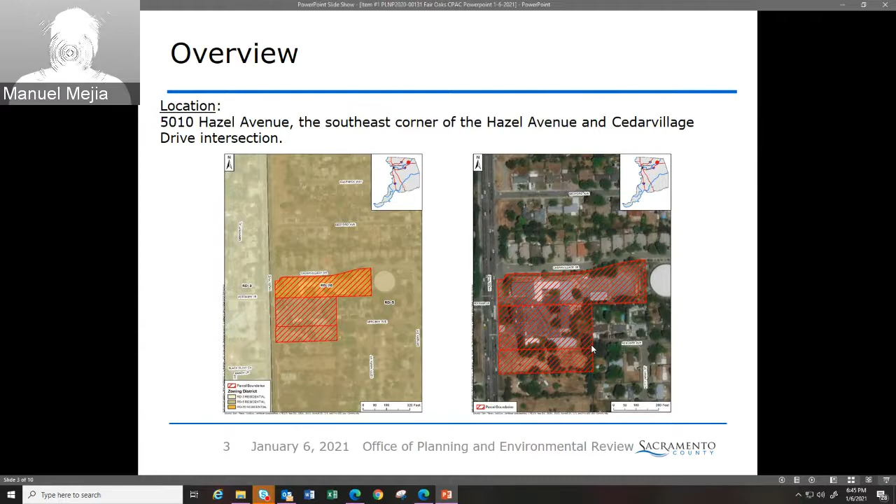This request is for a use permit amendment to allow expansion of an existing church by increasing the assembly use to 800 persons, the expansion of the private K-12 school to allow up to 300 students, and the future construction of a 25,000 square foot new building and additions to replace existing modular buildings, and construction of new parking. This also includes a design review to comply with the countywide design guidelines. There is an existing use permit granted in 1984, which was approved to legalize an existing church with school and allow a mobile home to be placed on the property as a residence. Next slide.

Additional information: the project is separated into two phases. Phase one, which is what they're doing now, is a near-term plan to add 24 new parking spaces, new landscaping, and new driveways on the western portion of the property. Phase two, which can happen at any time in the future, is the master plan for an expansion involving construction of a 25,000 square foot new building, addition replacing the existing modular buildings, and construction of new parking. No set timeline for the future development has been set by the church; however, phase one development is targeted for 2022 to 2023.

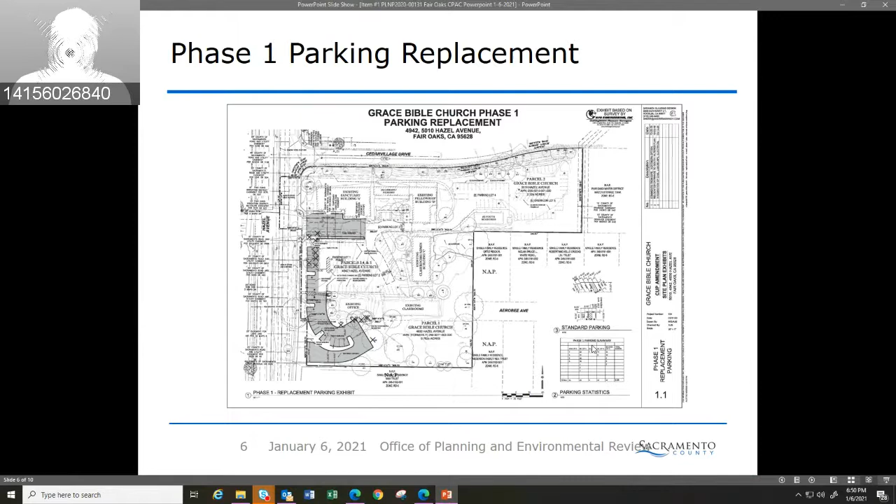As a result, the north and south driveways of the campus are being redesigned as part of the county project, requiring 21 existing parking spaces to be replaced with the 24 proposed under the phase one parking lot. There's a slight correction from the previous slide: the northern driveway is not currently an entrance to the campus, but exit only. That new driveway will become a signalized part of the intersection with both entrance and exit access for the campus. We can skip to the next two slides.

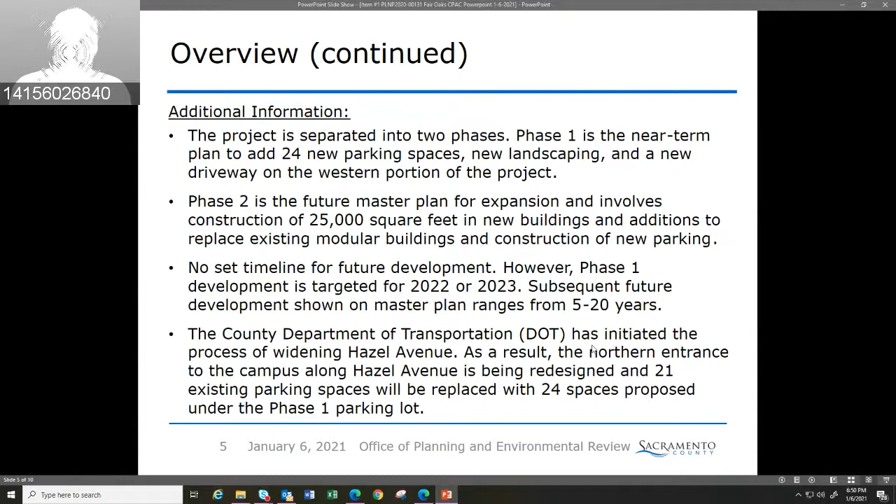Here we have the landscaping that's associated with the phase one development. Next slide, please.

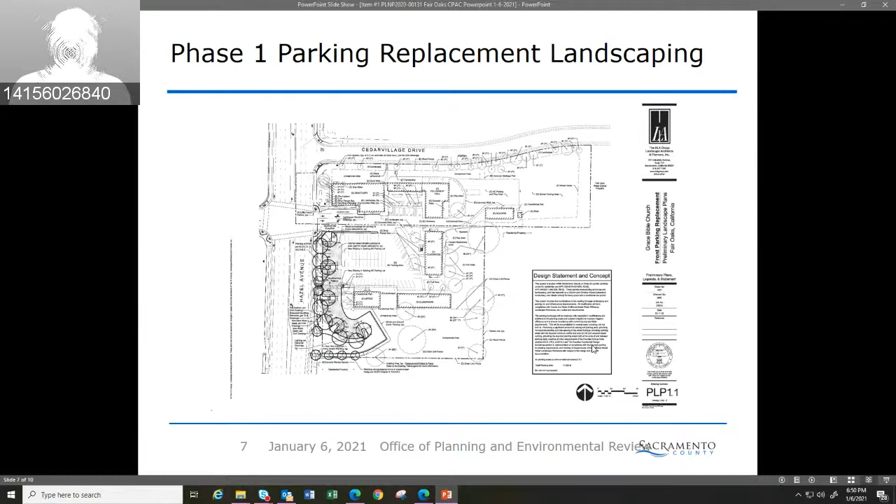Here we have a master site plan where there is 25,000 square feet being proposed in both new buildings and building additions. Those additions are proposed as a way to replace existing modular buildings, as well as new parking being proposed as part of this master future site development. So 20,000 square feet of this is being proposed under the new building that you can see at the center of this site plan, and an additional 5,000 square feet will be in addition to the sanctuary building as well as the nursery.

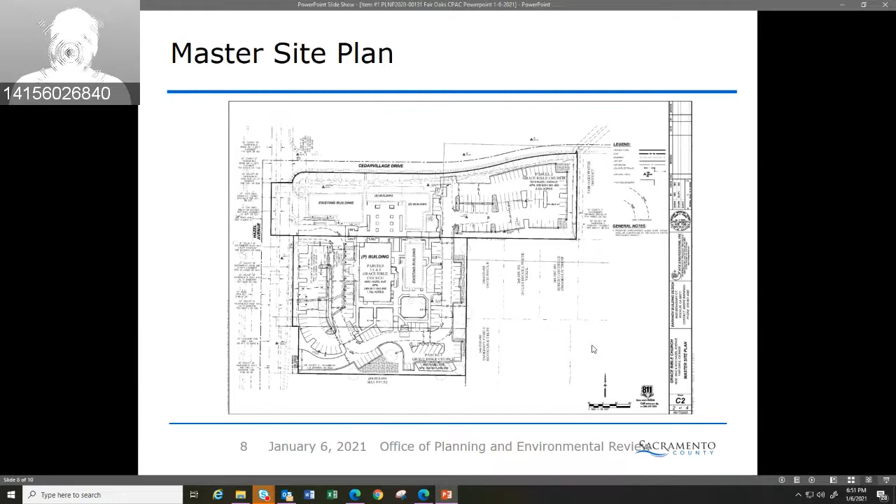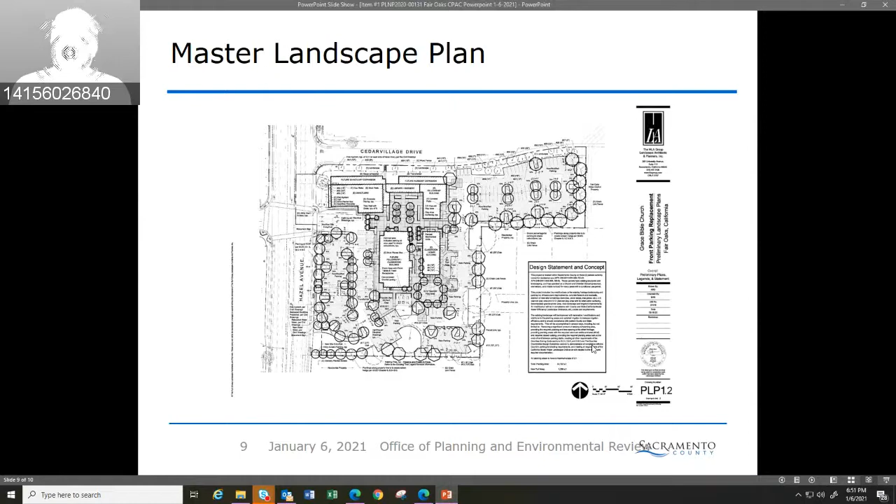Next slide, please. Here we have a view of the landscaping associated with that master plan as well. I think that concludes the presentation. Again, I am very sorry for the audio issues earlier, but I appreciate Manuel stepping in and covering it very well. Thank you very much.

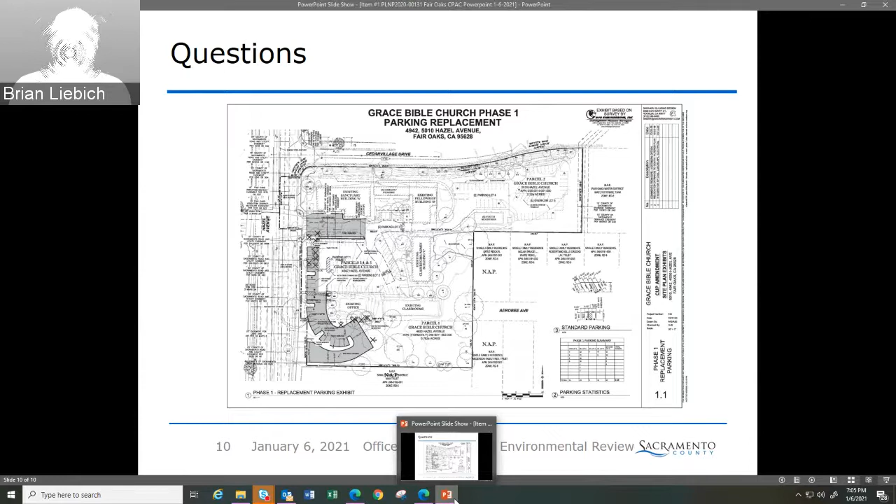Yes, so I can provide my contact information if you'd like to speak with me, or the church office is available Tuesday through Friday during normal hours. Walk right on in and talk with somebody there. We're happy to engage with anyone who wants to talk.

Yeah, this is Andre Baranov again. We did a couple of neighborhood meetings, but COVID certainly was just beginning when we did those, and we did one on Zoom. So we've been reaching out, but both of those were no-shows, which, you know, it's understandable given the complexity and the newness of everything that was going on.

At this point, we will go to general comment and discussion from CPAC members. We can open it up generally to discussion, but I'll go through if there are any comments. I'll start this time with Member Bowman.

No comments. I truly appreciate the thoroughness on taking everything into consideration, including the underground drainage and sound wall, and the entire presentation in full. So thank you.

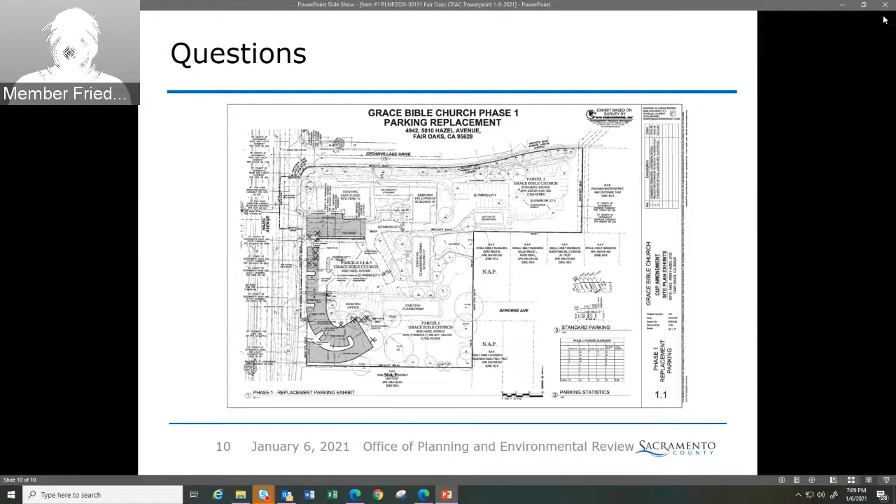Member Bowman makes a recommendation to approve as proposed. A motion to recommend as proposed. Do I hear a second? Member Wood, I second. Okay, and then we will do a roll call vote.

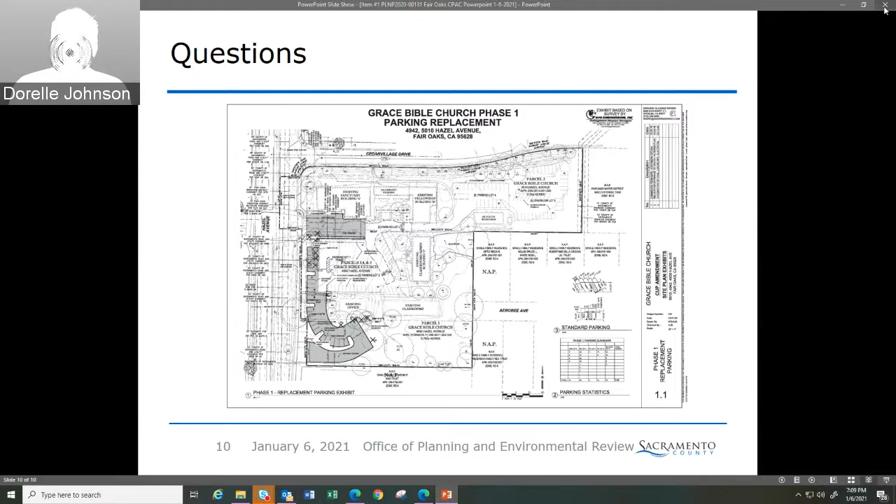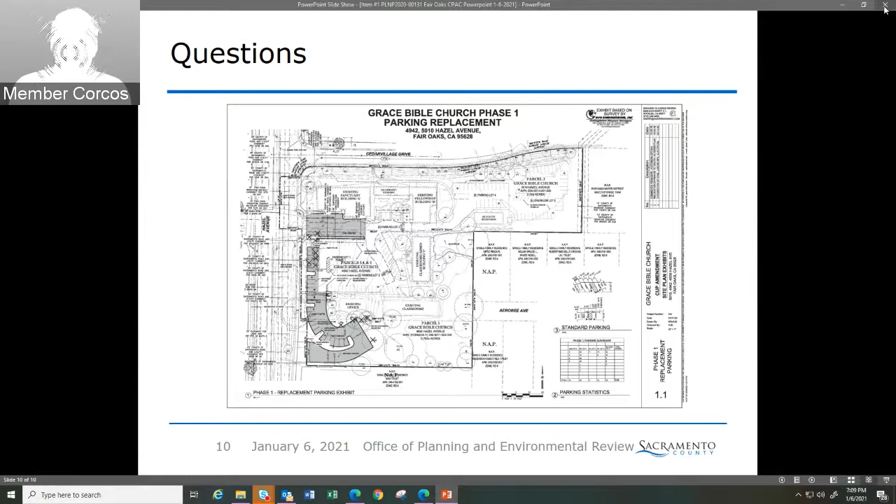This is Dorelle with the clerk of the board. Member Bowman? Yes. Member Corcos? Approve. Member Lees? Approve. Member Starkovich? Approve. Member Walter? Member Wood? Approve. And Member Friedman? Approve. Your motion carries with Member Walter being absent.

Thank you. Thank you all. Thank you. Thank you. No, nice little sound effect at the end. Perfect. Thank you very much for your time. Good luck with your project. Thank you. Yeah, thank you, Belites. Okay.

And we'll move on to item number 2 on the agenda, PLNP 2020-00291, and that's 8572 Sunset Avenue, and this is an early CPAC workshop.

I know we have a number of comments that came in, and I believe we have some comments that will be dialed in as well for this item. I just want to state that on workshop items, this is something we encourage for any item, because this gives an opportunity for the county as well as the applicant to present in front of the CPAC and get feedback. All feedback is welcome. We encourage feedback to be as constructive as possible and to offer suggestions where improvements can be made and how we can encourage the best use of our community. So this is something we always encourage applicants. It's nice to see workshops come before us.

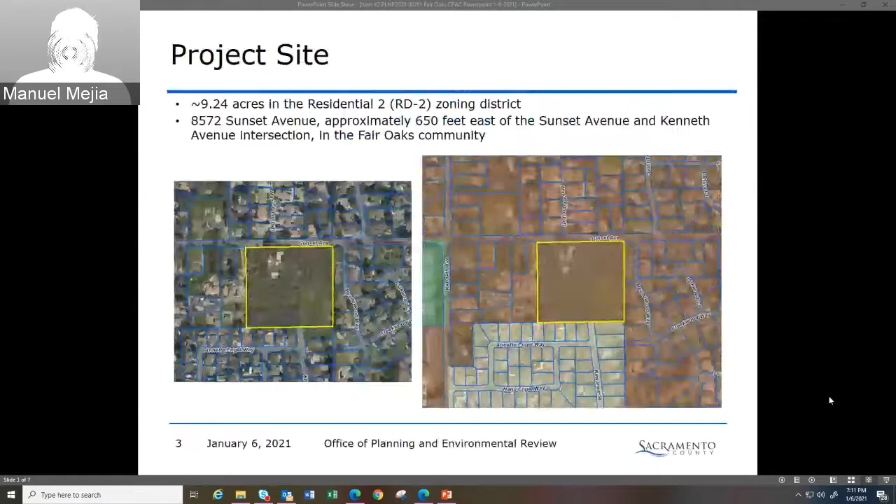Just a quick reminder that project materials can be viewed on our project viewer, and the best and easiest way to access them is to use the control number for the project, which is PLNP 2020-00291. Next slide, please.

The project site is located at 8572 Sunset Avenue, approximately 650 feet east of the Sunset Avenue and Kenneth Avenue intersection in the Fair Oaks community. The site is 9.24 acres and is zoned Residential 2, RD2. Next slide, please.

The proposal is to divide approximately 9.24 acres into 18 lots for the purposes of developing single-family residential dwellings. The proposed detached structures would range between 2,400 to 4,000 square feet each, and the majority would be single-story. Additionally, detached accessory dwelling units are proposed on 9 lots, and the resultant lots would be approximately half an acre each and would be served by a gated private drive from Sunset Avenue. Next slide, please.

This is a zoom in of the entry details of the gated private drive from Sunset Avenue. Next slide, please.

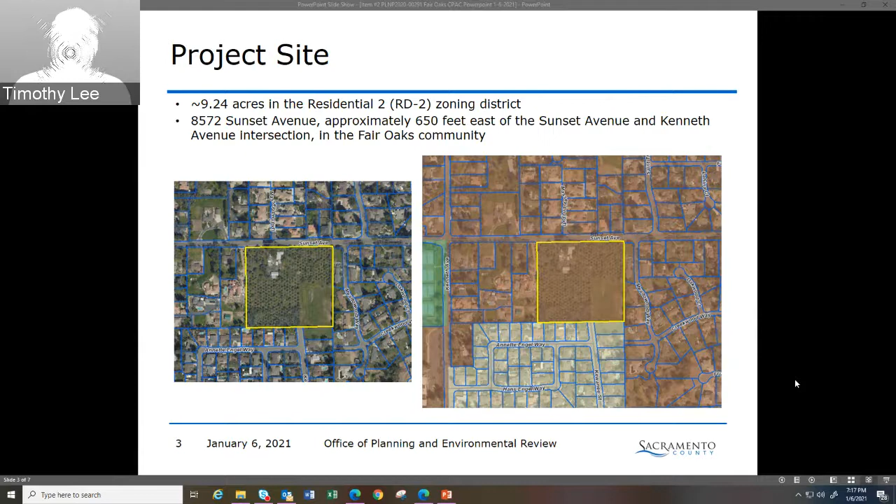So what we were proposing is an 18-lot gated community with the entry off of Sunset, and it would have a homeowners association that would maintain the common areas, the landscaping out along Sunset, sound wall, and the entry statement. As mentioned, the lots would average a half acre.

What we did was, because when we got in there, we wanted to get in front of the workshop, we didn't have a lot of time, so we put together this circular drive. We're more leaning towards ending it with a cul-de-sac over in that lower left corner now, so it would be like an upside-down J, kind of going around. It allows for a little bit larger lots in the project, and a little less streets.

We talked early on with transportation engineering, fire department, and water resources to make sure we were addressing the correct things. With respect to the homes we were showing, we had told the architect to show how some accessory dwelling units could fit on the lots, but it's not our intent as a developer to build nine. He just happened to show nine on there.

We just thought that maybe somebody would want something for their parents or grandparents, if they wanted to - the ordinance allows for it. So we were just kind of showing how it would be there, but the intent's not to build nine accessory dwelling units.

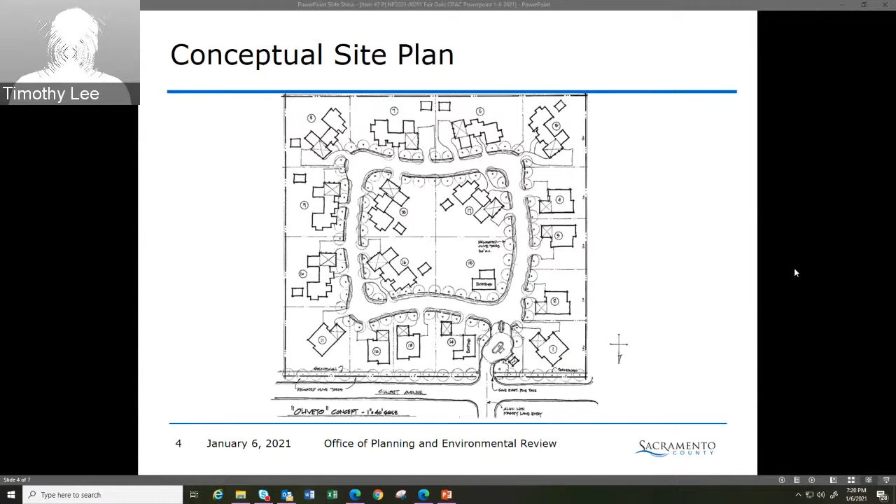So what we did is we aligned the gate entry with Massey Lane. It's the safest location at the top of the hill. We wanted to make sure there were good sight lines to the east and to the west, so that when people pulled out, it was a safe way to do it.

We also pushed the gate much farther back, more than twice as far as required by ordinance, because we wanted the ability for 2-3 cars to show up at the same time. We want them to easily pull in there and not back up traffic onto Sunset.

The entry design, we want to acknowledge the property's history as an orchard. So for the sound wall, while it would be masonry construction, we were going to face it with heavy timber and give it a more rustic feel.

There are some existing structures on site that will end up being repurposed, so we'll use their materials throughout the project. There's a couple old homes and some out structures located there.

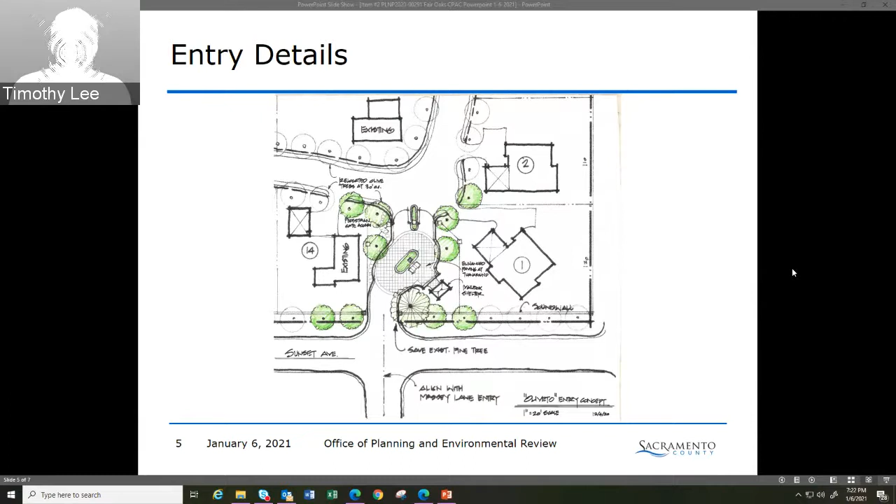Sunset Avenue will get Class B improvements to match what was done on the north side of the street across from where Massey Lane went in. So Sunset will get larger throughout that section, with curb and gutter.

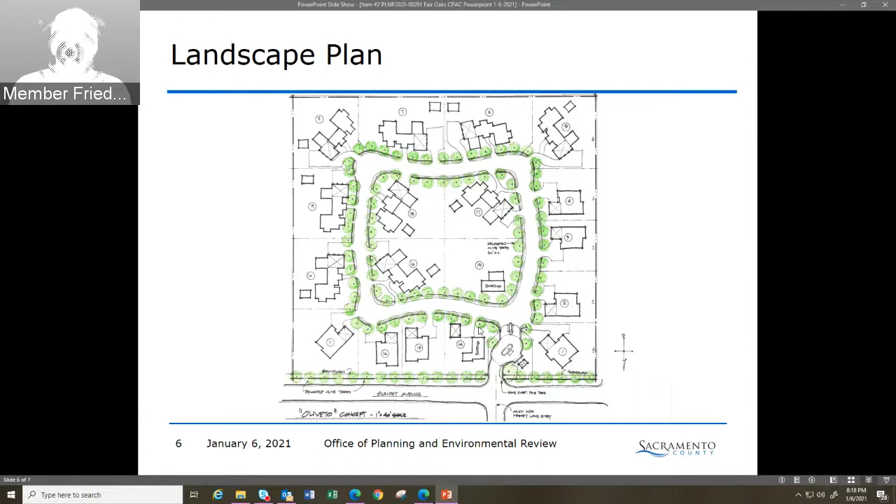And this is Chair Friedman. I also appreciate the design, the effort that you've put in, and it's something that I think we're all looking forward to seeing this progress and what it plays out to be. I would encourage, if there's an opportunity, to have a traffic impact analysis or study done, even if independently, just to make sure that things are addressed around the need for, if the county needs to widen streets, stop signs, stoplights, any of those things, that be followed through, and to continue to make attempts to communicate with the neighbors. Of course, that's something we always encourage, to make sure you're communicating regularly and clearly. We know that's been complicated by COVID, but to offer opportunities throughout the project for input. Otherwise, as this item doesn't require a vote, that can conclude the workshop item, and we wish you luck, and we look forward to seeing and hearing this item in the future, if that is the case.

Well, thank you, Chairperson, for your input and doing such a great job hosting it, and thank everybody on the advisory.

Thank you very much. And at this time, our next item on the agenda is annual election of officers.